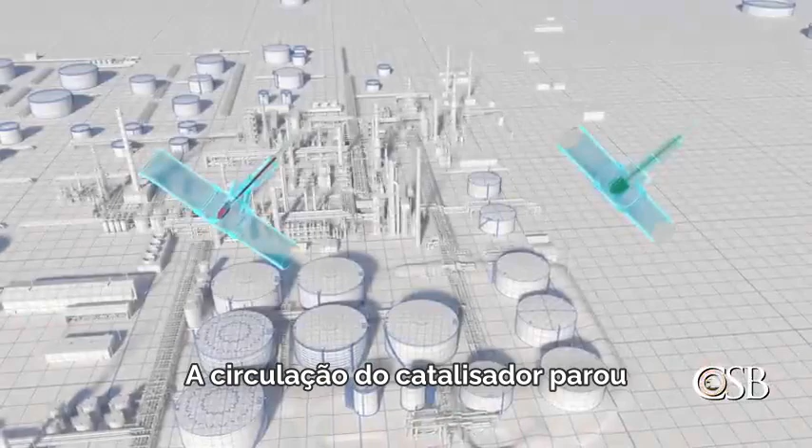To initiate the shutdown of the FCC unit, refinery workers stopped the flow of hydrocarbons to the reactor and closed the two slide valves connecting the reactor to the regenerator. Circulation of the catalyst stopped, but one of the two slide valves was eroded. Catalyst from the reactor fell through the valve to the regenerator, leaving an open path for air or hydrocarbons to flow between the two pieces of equipment.

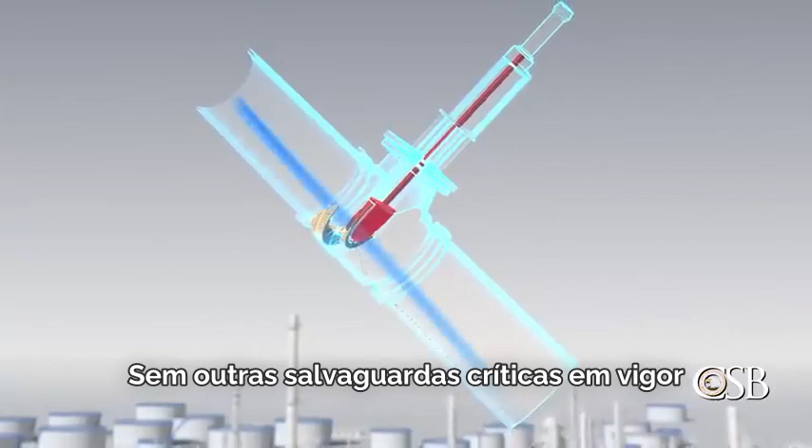Without other critical safeguards in place, air from the regenerator flowed backwards through the slide valve into the reactor. The air then moved into the main column and other equipment downstream of the reactor, where it formed a flammable mixture with hydrocarbons. At approximately 10 a.m., the hazardous mixture of air and hydrocarbons found an ignition source, and there was a large explosion.

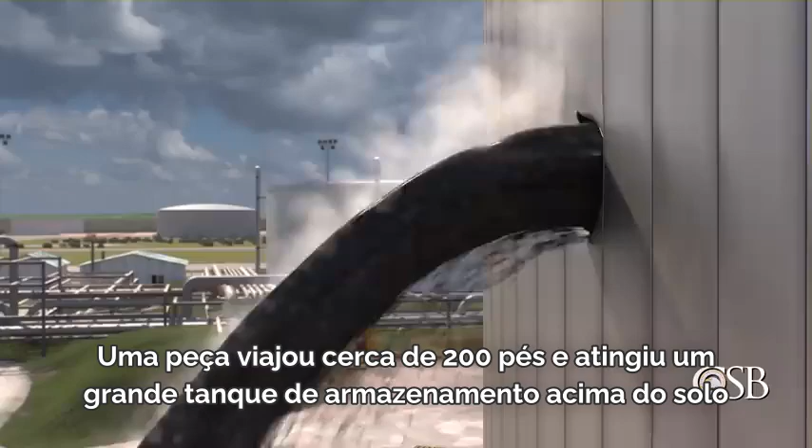Debris from two vessels flew into the air. One piece traveled about 200 feet and hit a large above-ground storage tank, puncturing the side of the tank and releasing hot asphalt. Asphalt poured out of the tank over the containment berm and into the refinery's operating units, where it spread along the ground.

At around 12 p.m., the released asphalt ignited at the storage tank and a fire broke out. The fire traveled along the stream of asphalt to the refinery's crude and FCC units. The fire produced a huge plume of black smoke, leading to the evacuation of a portion of the city of Superior. Typically, this type of asphalt fire can burn for days.

A plan to extinguish the massive asphalt fire was developed by the refinery's emergency response team. The refinery began to address the fire together with the Superior Fire Department. They used a combination of dry chemical fire extinguisher and water to attack the fire from multiple directions and surround it within a containment area.

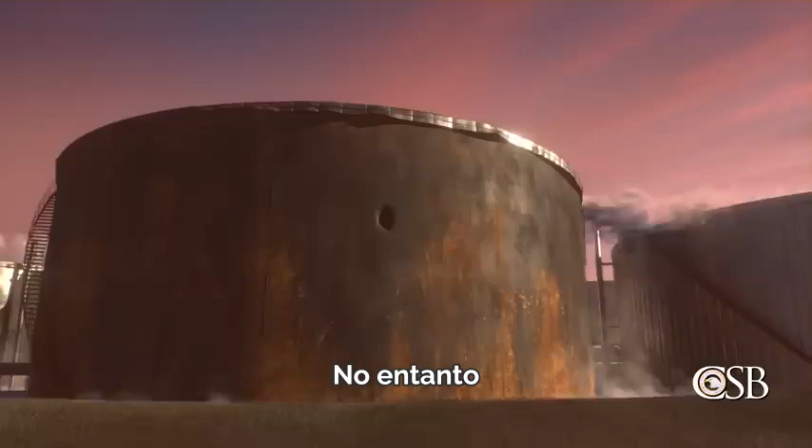With the fire contained, emergency responders were able to put out the asphalt fire at around 7 p.m. The asphalt fire had been extinguished in a matter of hours, as opposed to days as had been initially anticipated. The evacuation order was lifted, and Superior residents were allowed to return home. Nevertheless, 36 Husky employees and contract workers sought medical attention for injuries.

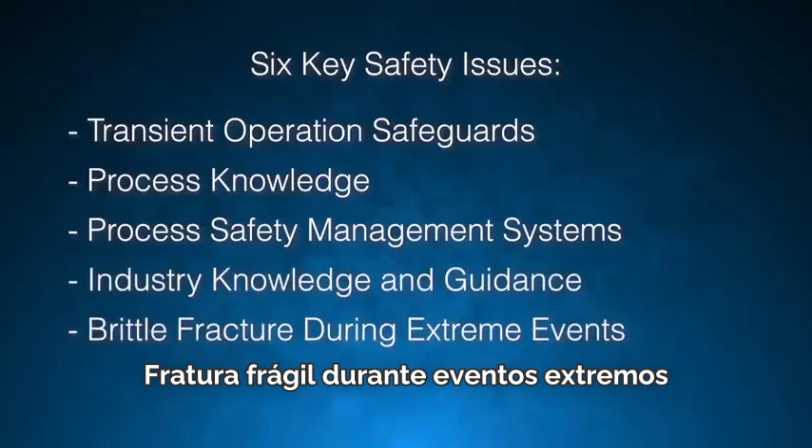The Chemical Safety Board launched an investigation and identified 6 safety issues that led to the explosion and fire. They are transient operation safeguards, process knowledge, process safety management systems, industry knowledge and guidance, brittle fracture during extreme events, and emergency preparedness.

The first safety issue is transient operation safeguards. At the time of the incident, the Superior Refinery was shutting down the FCC unit. Shutdowns, like startups, standbys, and emergencies, are known as transient operations, meaning activities that take place outside of normal process operations. Transient operations can pose unique hazards that are not present during normal operations.

An FCC unit presents atypical hazards during transient operations because air and flammable hydrocarbons are present within interconnected equipment, which increases the likelihood of an explosion. Therefore, during the shutdown of an FCC unit, certain FCC-specific safeguards must be in place to ensure that air and hydrocarbons do not mix.

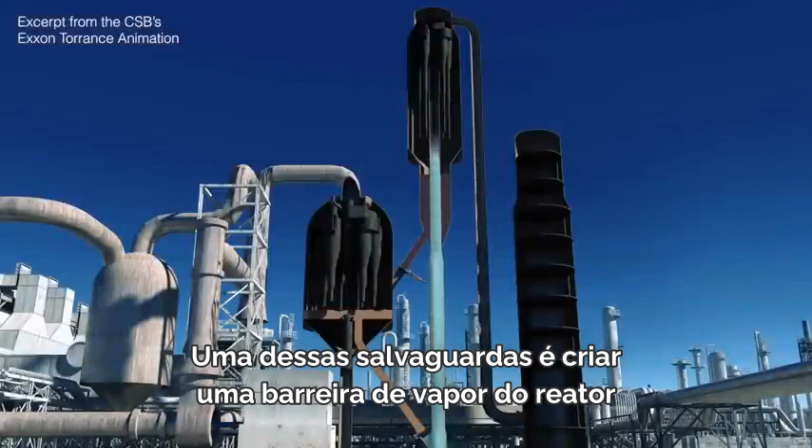But the CSB found that at the Superior Refinery, these safeguards were not implemented or were ineffective. One such safeguard is to create a reactor steam barrier. This is done by injecting a large amount of steam into the reactor, creating a higher pressure in the reactor than in the connected equipment.

This prevents air from the regenerator from flowing into the reactor, where it can then enter the main column and other equipment on the hydrocarbon side of the process.

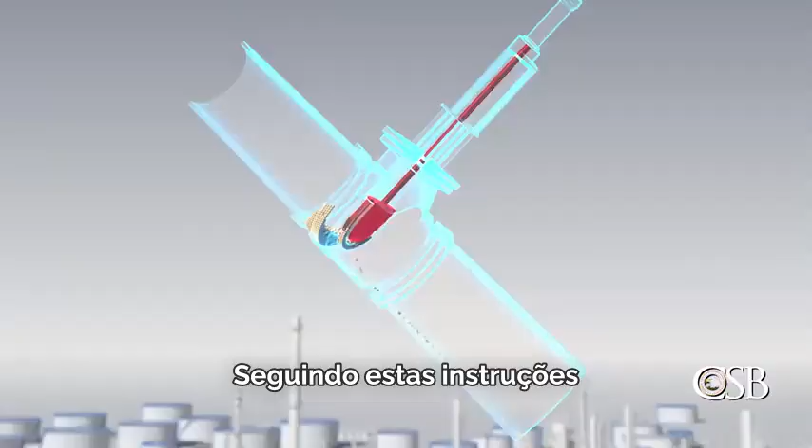However, Superior Refinery's shutdown procedure did not call for a reactor steam barrier, but instead instructed the board operator to maintain the regenerator at a higher pressure than the reactor at all times. Following these instructions set the refinery on a path toward disaster, as this hazardous pressure differential ensured that air from the regenerator would flow into the reactor and onward into the hydrocarbon side of the process, where a flammable mixture formed.

Another critical safeguard that should be in place during an FCC unit shutdown is to use natural gas or nitrogen to purge air from the main column to the flare system to prevent oxygen accumulation inside the equipment.

But the CSB found that even though Superior Refinery had the ability to purge air out of its main column, the refinery had not incorporated this safeguard into its operating procedures for transient operations or its operator training program, so it was not done. Instead, the refinery overly relied on the catalyst slide valves to keep the air and hydrocarbon systems separated during the shutdown.

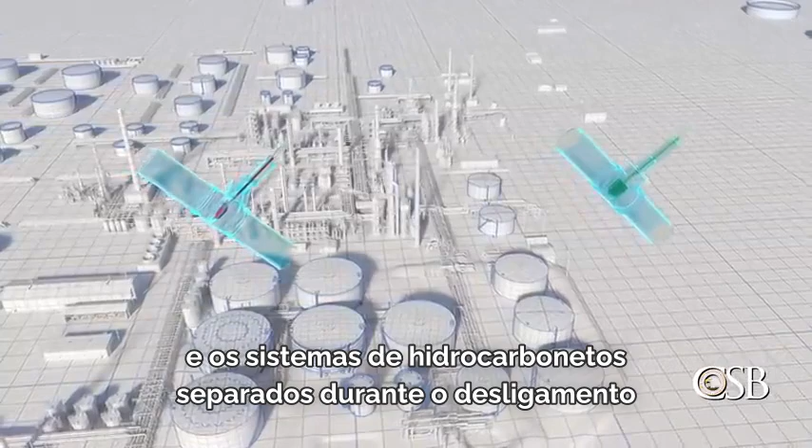But slide valves are designed to control flow of catalyst during normal operations, not to prevent flow of air and hydrocarbons during a shutdown. And one of the slide valves was eroded after years of use.

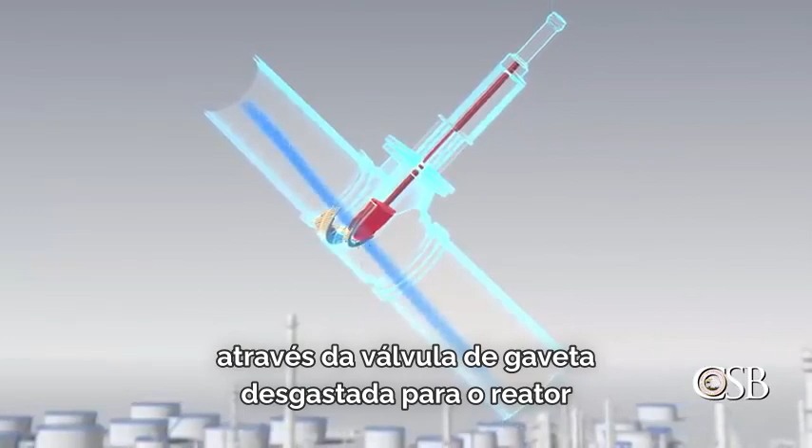Therefore, without other safeguards in place, air was readily available to pass from the regenerator through the worn slide valve into the reactor and onward into the hydrocarbon side of the process.

During transient operation for any process involving flammable materials, operators need to understand the potential for air to enter and accumulate inside equipment. Written procedures should be in place that outline safeguards meant to prevent air and hydrocarbon mixtures, and operators should be trained to understand why those safeguards are critical.

To that end, the CSB made a recommendation to the new owners of the refinery, Cenovus Energy, to establish safeguards to prevent explosions in the FCC unit during transient operation and incorporate these safeguards into written operating procedures.

The second safety issue found by the CSB is process knowledge. The CSB found that throughout the history of the Superior Refinery, under several owners, its FCC expertise was mostly in-house and with minimal engagement with other refineries.

In addition, the refinery's use of external technical experts was limited to assessing the FCC unit's performance during normal, not transient operations. The Superior Refinery required its operations department to review and recertify its operating procedures annually.

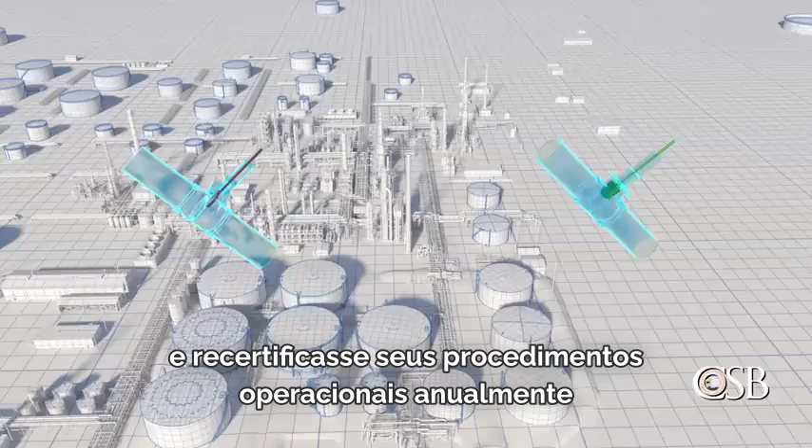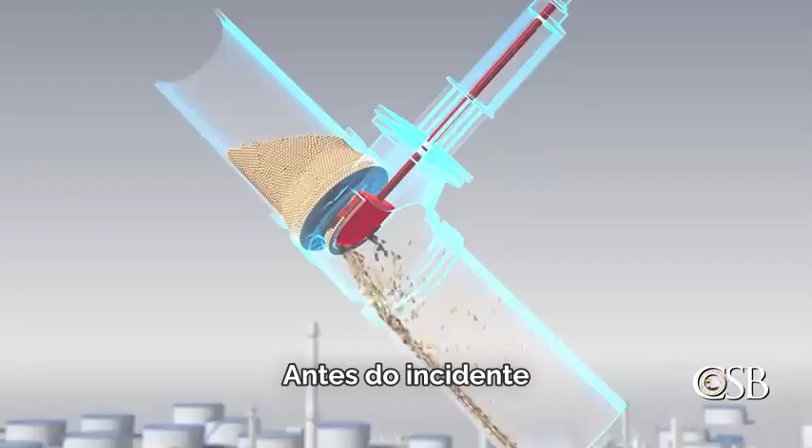But the refinery had not performed a technical review of its FCC unit operating procedures with its process engineers, the FCC technology licensor, or outside consultants for at least 25 years prior to the incident, and possibly since the unit was commissioned around 1960.

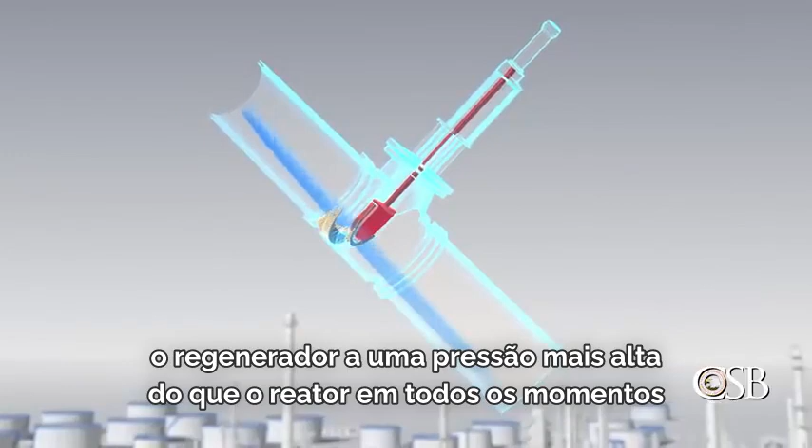As a result, the refinery's shutdown procedures, which instructed operators to maintain the regenerator at a higher pressure than the reactor at all times, directly contradicted the FCC technology licensor's guidance and created the dangerous condition that enabled the explosion to occur.

The Superior refinery had serious errors in its FCC unit operating procedures that directly led to the explosion. But refinery employees did not have sufficient process knowledge of FCC unit technology to recognize the problem. Had the refinery engaged with other sites or outside experts to review its operating procedures, the technical errors could have been identified and corrected, and the explosion could have been prevented.

Therefore, the CSB made a recommendation to Cenovus Energy to develop and implement a technology-specific knowledge-sharing network program across all Cenovus-operated refineries, which at a minimum includes an FCC technology peer network.

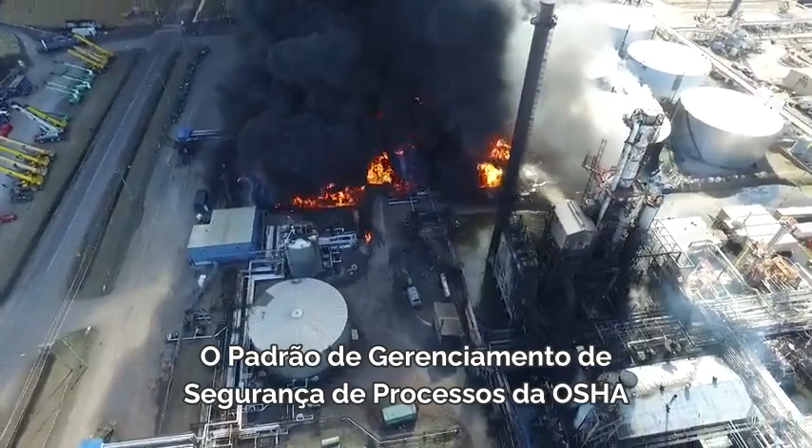The third safety issue highlighted by the CSB is process safety management systems. OSHA's Process Safety Management Standard and the EPA's Risk Management Plan rule require facilities like the Superior Refinery to implement process safety management systems. Process Safety Management, or PSM systems, are meant to identify, evaluate, and control process hazards. But the CSB found that the refinery's PSM systems were inadequate.

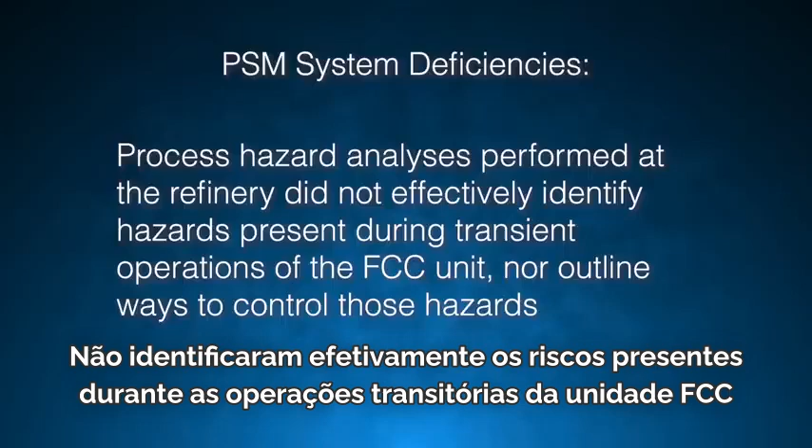For instance, the refinery's process safety information did not include the operating manual published by the FCC technology licensor. Process hazard analyses performed at the refinery did not effectively identify hazards present during transient operations of the FCC unit, nor outline ways to control those hazards. The refinery's operating procedures lacked clear instructions and were not technically evaluated. And the operator training program at the refinery did not properly prepare operators to shut down the FCC unit safely.

The deficiencies we found in Superior Refinery's process safety management systems directly contributed to the explosion. To prevent catastrophic incidents, companies should ensure that their PSM systems are effective at identifying, evaluating, and controlling process hazards, not just during normal operations, but during transient operations as well.

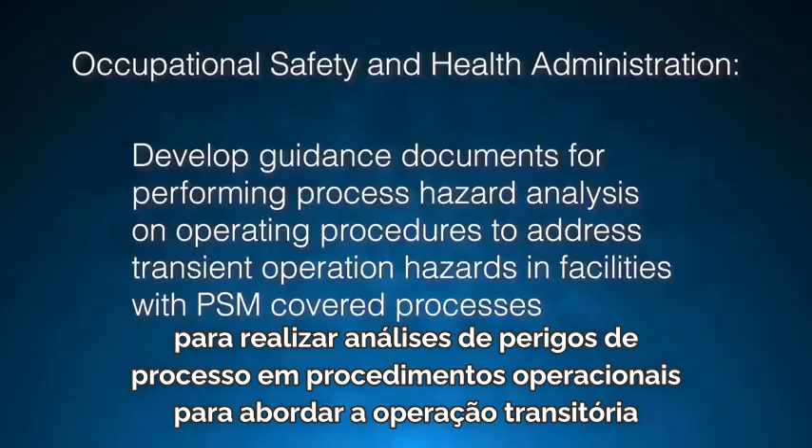As a result of its findings, the CSB made a recommendation to OSHA to develop guidance documents for performing process hazard analysis on operating procedures to address transient operation hazards in facilities with PSM-covered processes.

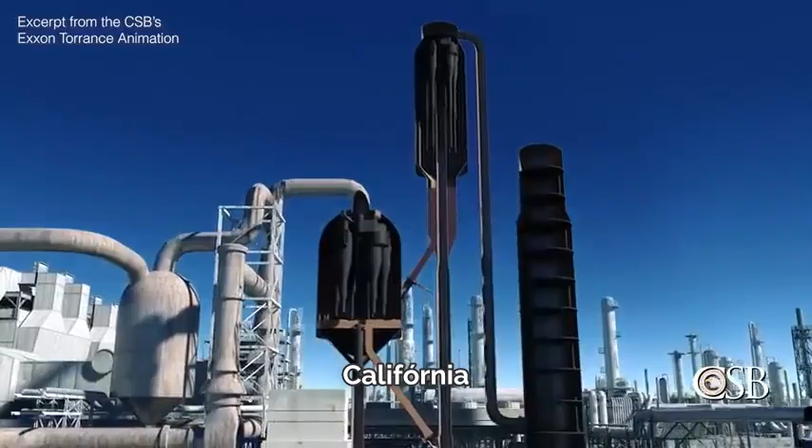The fourth safety issue found by the CSB is industry knowledge and guidance. The explosion at Superior Refinery occurred less than one year after the CSB released its report on a similar explosion at the ExxonMobil refinery in Torrance, California. Industry trade groups distributed lessons learned from the California incident, as well as the CSB's safety video on the explosion. But despite these educational efforts, employees at the Superior Refinery did not learn or apply these key lessons.

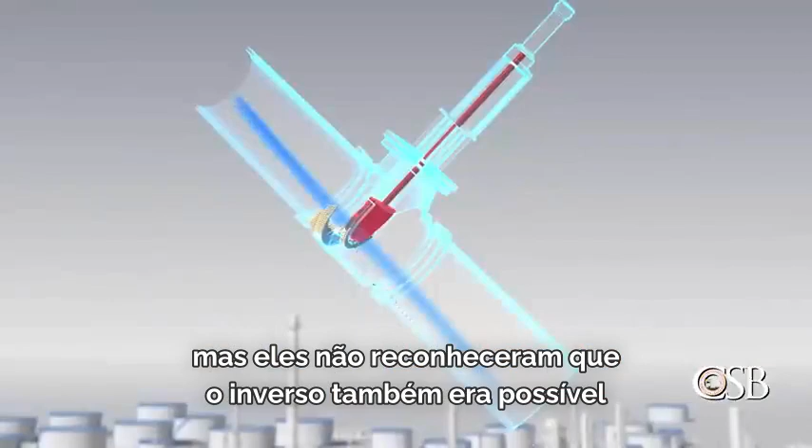For example, the workforce appeared to understand that flammable hydrocarbons had flowed from the California refinery's main column into the regenerator and subsequently exploded. But they did not recognize that the reverse was also possible. Therefore, they did not realize a similar explosion was preventable by implementing a reactor steam barrier.

In addition, there is currently no industry publication that establishes common basic process safety expectations for all FCC units. Although the refining industry has accumulated many years of FCC process safety knowledge from its members, this information is scattered, complex, and not easily accessible to some refinery employees.

The CSB believes that a publicly available technical publication outlining recognized and generally accepted good engineering practices for safe FCC operation, and incorporating lessons learned from this and other similar CSB investigations, could help drive important safety improvements in FCC units across the United States.

Therefore, the CSB made a recommendation to the American Petroleum Institute to develop a publicly available technical publication for the safe operation of FCC units that is applicable to both new and existing units.

The fifth safety issue outlined by the CSB is brittle fracture during extreme events. The two process vessels that exploded were constructed from a grade of steel that is no longer recommended for new equipment. The vessels failed by brittle fracture, which means that they shattered like breaking glass.

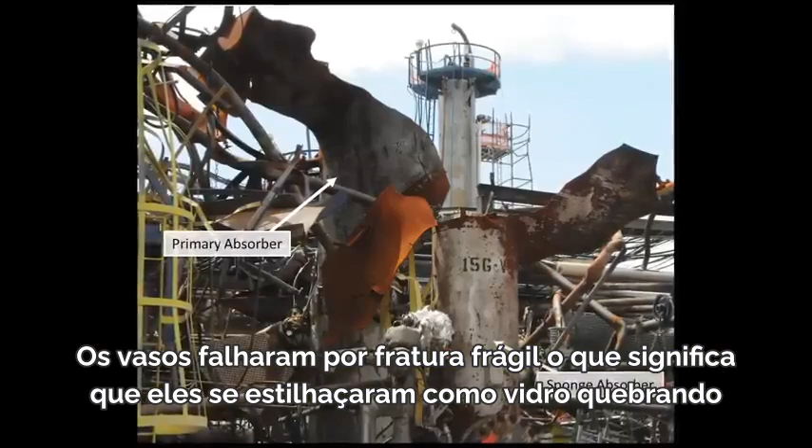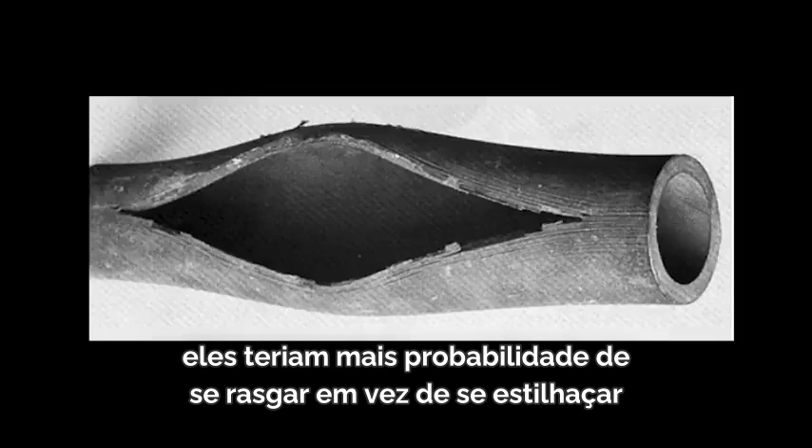When the vessels failed, the force of the explosion sent over 100 metal fragments from the shattered vessels around the refinery. One large piece struck and punctured the nearby asphalt tank. Had the process vessels been made of a new grade of steel with better toughness properties, they would have more likely torn open rather than shattered, resulting in fewer, if any, dangerous projectiles.

While some vessels may be deemed fit for service, they're not usually assessed for their performance during an explosion. Selecting materials of construction that are not susceptible to brittle fracture can help lessen the impact to the surroundings should an extreme event occur. The sixth and final safety issue noted by the CSB is emergency preparedness.

The Superior refinery uses highly toxic hydrofluoric acid, or HF, in its alkylation process. The HF storage tank was about 150 feet away from the two vessels that exploded, which is about 50 feet closer than the asphalt storage tank that was damaged. The HF tank was not punctured or otherwise compromised, but the CSB considers this incident to be a serious near-miss event with hydrofluoric acid.

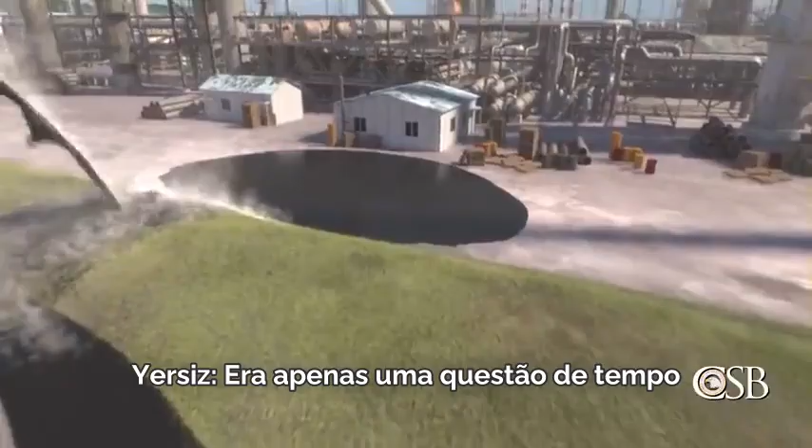Explosion debris did, however, puncture the asphalt storage tank, causing over 17,000 barrels of hot asphalt to spill out into the refinery, where it accumulated for approximately two hours before it ignited. It was only a matter of time until the spilled asphalt caught on fire.

Had emergency responders treated the asphalt as a flammable liquid, they could have taken more effective action sooner to control the asphalt spill before it ignited.

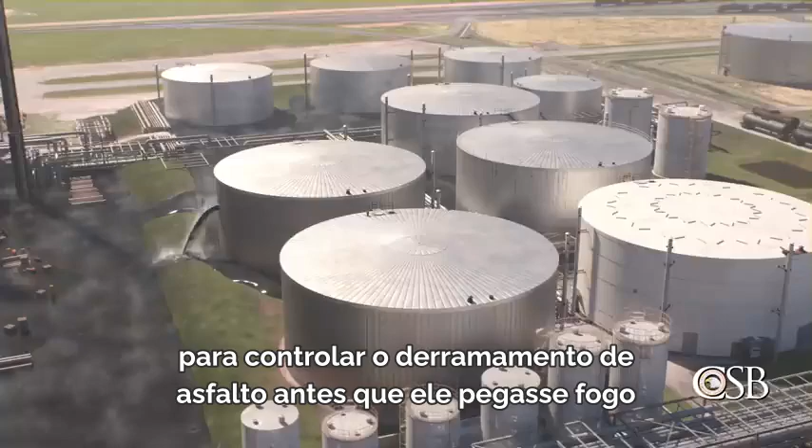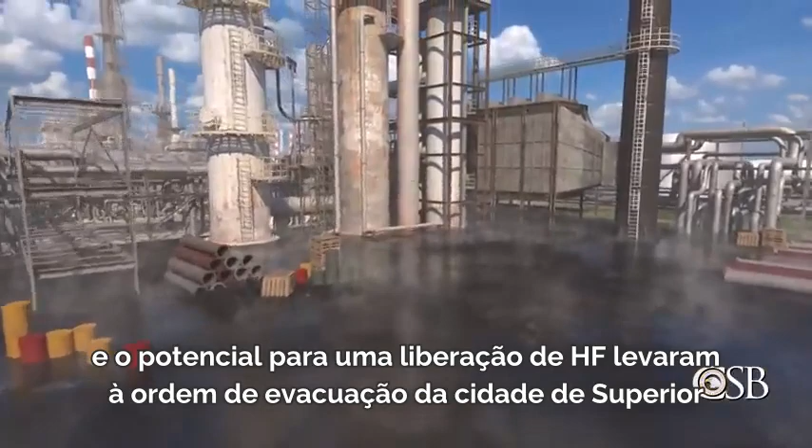The result is that the initial explosion escalated into a large fire that caused hundreds of millions of dollars in property damage. In addition, smoke from the fire and the potential for an HF release prompted the City of Superior evacuation order, causing disruption to over 2,500 members of the surrounding community. The refinery remained shut down for more than four years following this incident.

In response, the CSB made a recommendation to the EPA to develop a program that prioritizes and emphasizes inspections of FCC units in refineries that operate HF alkylation units to verify that safeguards that prevent explosions during transient operations are in place.

The incident at the Superior refinery should serve as a wake-up call to other refineries, especially those that have hydrofluoric acid alkylation units. During transient operations like shutdowns and startups, refineries must have necessary safeguards in place and follow correct procedures to prevent disasters from occurring. Thank you for watching this CSB safety video.